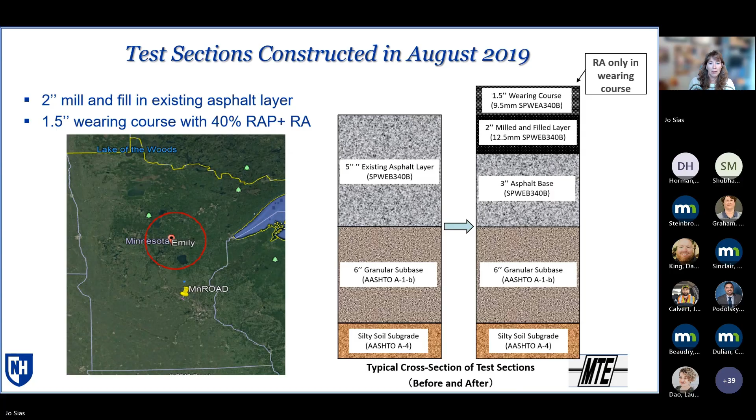But again, the focus is really on what's happening with these materials over time. In terms of the materials in each test section, there are 7 sections, each with a different RA product. The mixes had 40% RAP, and the dosage was determined by each of the RA producers with the intent of meeting a PG -34 target for extracted and recovered binder. Each producer had a sample of the RAP and determined the appropriate dosage. These 7 RA products are in test sections numerically ordered from 6001 to 6007.

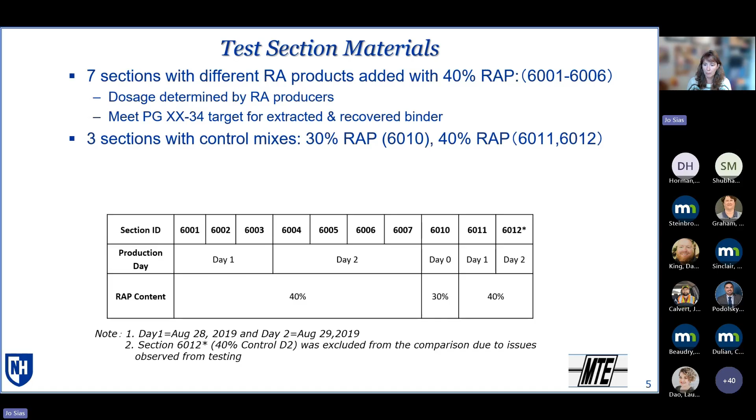There are also 3 control mixtures: a 30% RAP mixture, which is 6010, and 2 40% RAP control sections, since these were constructed over 2 days, so there's a day 1 and a day 2. One thing to note is that during the initial phase 1 work, we found some issues with the day 2 control, the 40% RAP. So while all the testing results are included in the report, for the comparison we're just focusing on the day 1 40% control.

One thing to also note with the different RA products: 6001 through 6006 were all added in line at the plant, while the 6007 material was blended at a terminal. So while they have the same base binder grade, it's not exactly the same base binder that was used in 6007 as for the other 6.

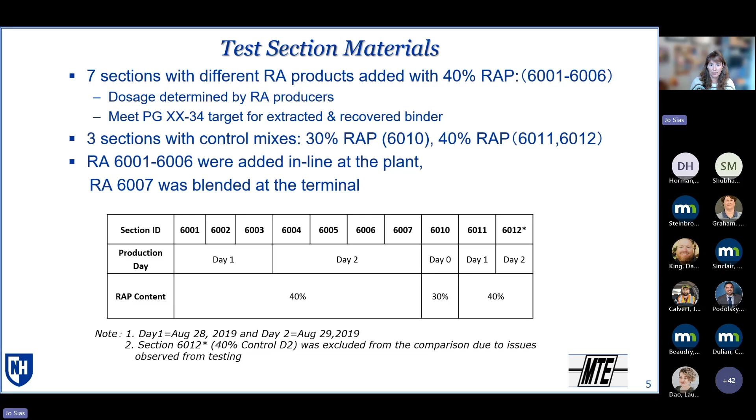Now the testing - this basically threw the kitchen sink at these mixtures. The mixture tests were conducted by various NRRA agencies, and additional mixture tests were conducted at UNH.

We've got a range of testing from Hamburg wheel tracking tests, TSR testing, to rheological testing with complex modulus, various fracture tests including the cracking tolerance index, direct tension cyclic fatigue testing, disc shape compact testing.

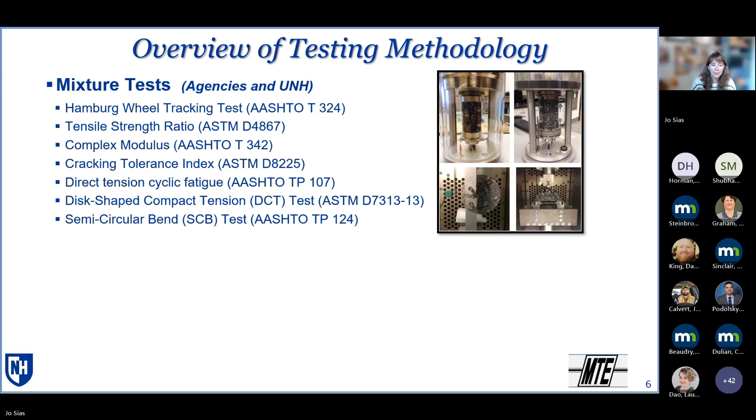Low temperature, and then semicircular bend or I-FIT testing was conducted on these mixtures as well. In terms of the binder tests, most of the binder testing was conducted by MTE, and this included 4mm DSR.

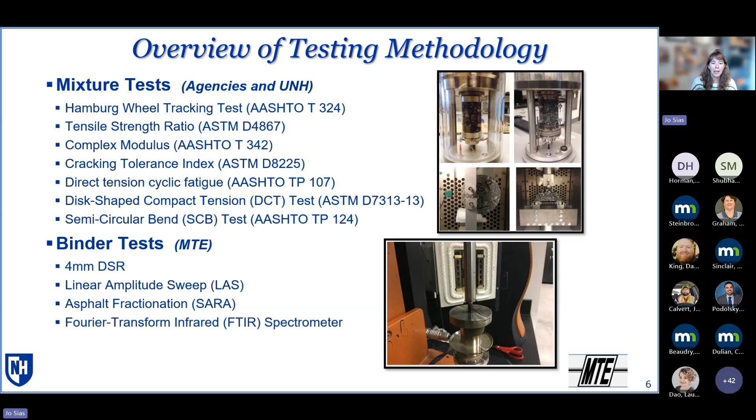This was used for rheological characterization, and that information was used to get the PG grade information using the documented procedure from 4mm DSR testing. LAS testing was also conducted to look at the fatigue of the binders, and SARA and FTIR testing was also conducted. This range of testing was conducted on a lot of different aging conditions.

This is an overview. We've got 10 different test sections, and from those test sections during construction, plant produced loose mix was collected. That plant produced loose mix was reheated and compacted for testing, and also conditioned in the laboratory with loose mix conditioning for 6 hours at 135, as well as 7 days at 95 degrees C. So 2 long-term aging protocols were used on the loose mix.

And then field cores are being taken every year. So the data that I'll be showing today shows the first 4 years of field core results. Now, from both the loose mix and from the field cores, binder was extracted and recovered.

The material that was recovered from the loose mix was tested in the as extracted condition - essentially short-term aging after it's been through the plant - and then additional 20, 40, and 60-hour PAV. We also extracted and recovered the material from the mix that had been through the 2 laboratory long-term aging conditions.

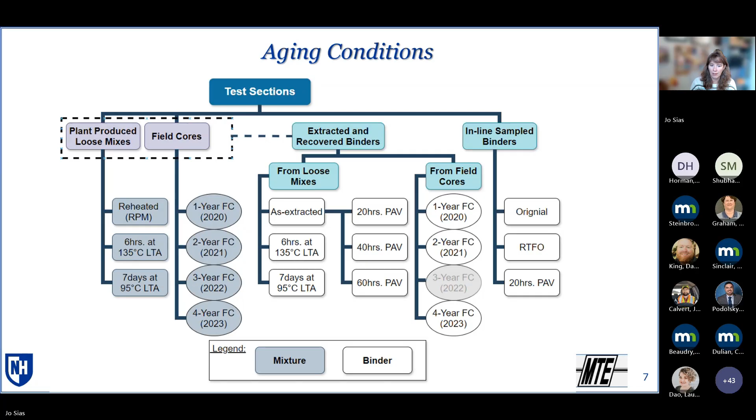So getting into some of the binder testing results - again, I'm focusing here on just the extracted and recovered binder materials. So we're going to start with the rheological properties.

Looking at the results from the 4mm DSR testing and looking at it in the form of the continuous PG information that comes out of that analysis. What you're seeing here in these bar graphs is each group of bars represents each of the test sections.

So you've got the 7 RA sections from 6001 to 6007, and then we've got our 2 controls - the 30% RAP and the 40% RAP. This is just the day 1 40%. In parentheses, you can see which day each of these materials were produced.

6001 through 6003 were produced on day 1. 6004 to 6007 were the day 2 production. But again, we're comparing everything back to the 30 and 40% controls.

Now, within each set of bars, you have the results from the field cores presented first - the year 1, year 2, and year 4 field core results. Then the next set of bars, with the yellow, is the as extracted from the loose mix, and then the 6 hours at 135, and then the 7 days at 95.

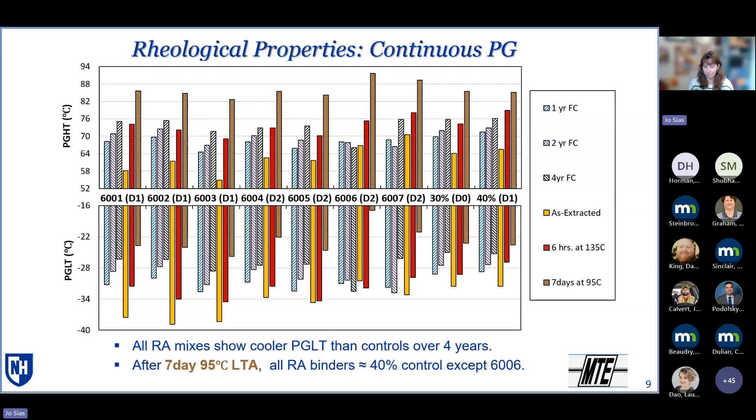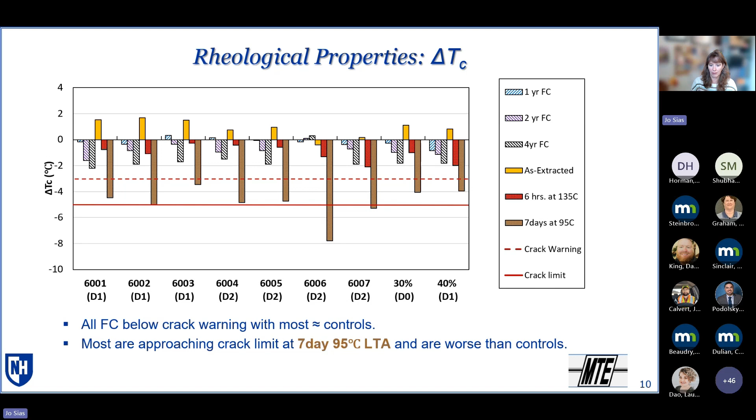Now we can also look at plotting this a different way. We've got a series of figures that shows the change in the different parameters as compared to the 30% control and as compared to the 40% controls. If we look at the figure in the upper left, this is for 7 different series of data — each of the RA mixes, looking at the relative percentage as compared to where we're seeing the control mix.

You can see most of these mixes, with the field aging, are getting closer to both the 30% control and the 40% control over time, with the one exception of the 6006 where it's showing a lot bigger difference. So if it's a more positive difference, it's a lot worse than what we're seeing with the controls.

So that's with the field aging, the two plots on the left. The two plots in the middle show what's happening with the PAV aging. Again, as a reminder, this is the as-extracted material as it was produced, then recovered and aged for 20, 40, and 60 hours.

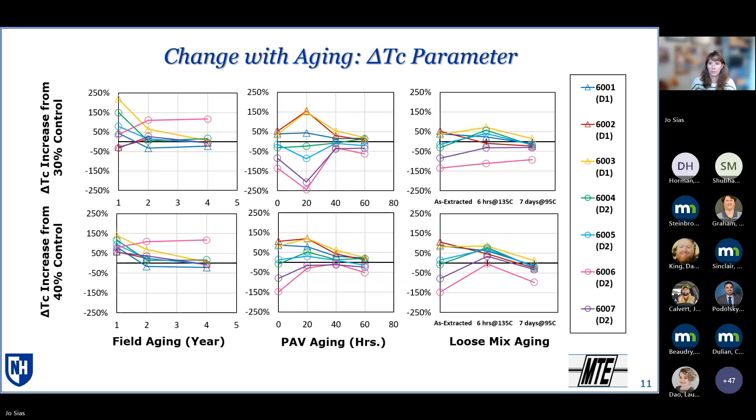Okay, moving on to the FTIR. What I'm focusing on here is just the carbonyl ratio. Same set of bars where we've got the change with the field cores, and then the change with the different laboratory aging protocols. Now with both of these, we're seeing an increase in the carbonyl ratio for the most part with all these different RA products. And we're also seeing generally higher carbonyl ratios than the controls for all the different aging conditions.

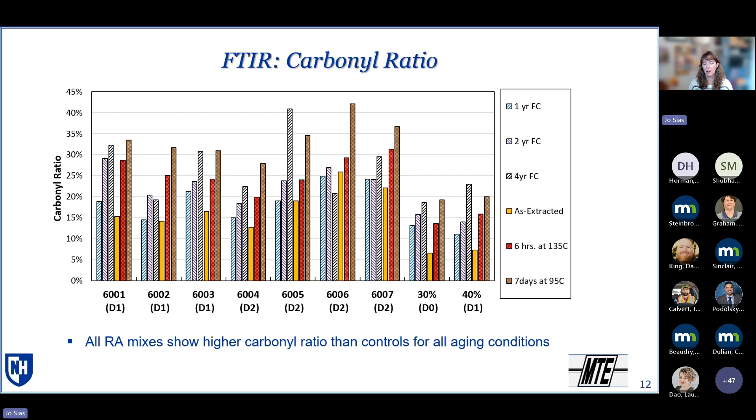This is expected just because of the chemistry of these different materials, that we would see different carbonyl ratios. So really focusing on how these are changing over time with the field cores and then also with the laboratory aging. Similar types of plots that we looked at previously, showing the actual carbonyl ratio values. With the field aging, in terms of the spread, how these change from the control values, not a lot of differentiation in terms of it changing a whole lot from the controls. So we're still not seeing a lot of difference there.

But when we look at the PAV aging, as we get from the 20 to 40 to 60 hour, we're seeing those groupings come a lot closer together when we compare them to both the 30 and 40% control. This is something we'd expect to see, where as we age them longer, things are getting closer in terms of those properties. Same thing we're seeing with the loose mix aging - as extracted, 6 hours, and then the most severe, 7 days. Again, the groupings are much tighter together.

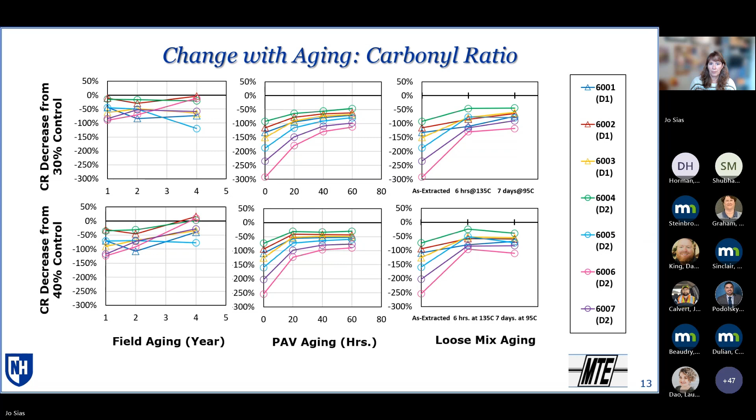All right, so moving on to some of the mixture testing results. We'll start again with the rheological properties. So we're starting with some of the results from the complex modulus testing. What I'm showing here is the Glover-Rowe mix parameter, which combines stiffness, dynamic modulus, and phase angle value, similar to the Glover-Rowe for binder.

One thing to note - because we're looking at field cores, when we do the testing on the field cores, we have to test them at whatever the field core air void content is. When we tested the laboratory mixes, we have control in the fabrication process, and those were all fabricated to 7% air void content. So to do these comparisons, what we've done is adjusted the field core results to an equivalent 7% air void content. The process for doing that is detailed in the report, but it's a way to try to get everything a little bit more on an even playing field, since we don't have the ability to control the air void content of the field cores.

Now with the mixed results, we do have the 3-year field core results in here, so you can see that additional orange bar for those results. Everything else is set up the same in terms of what we've talked about before, with the field cores presented first, and then the reheated plant mix and the 2 long-term laboratory loose mix aging protocols.

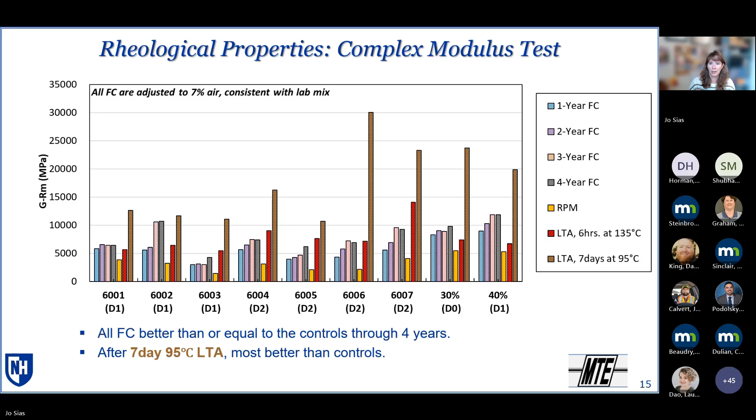Okay, so we've done the same thing in terms of looking at the change from the 30% and 40% control mixes. Again, positive value means a lower Glover Rowe mix property, which we'd expect to be better for cracking properties and performance in the field.

So if we look on the left-hand side at the field aging, you can see, again, pretty steady in terms of not seeing a whole lot of change through the 4 years of field aging for most of these mixes. Again, a couple of exceptions with the 6002 and 6007 when we look at how they're doing compared to the 30% control.

And then not as much of a change, but still seeing that change with the 40% control as well. For the loose mix aging, kind of similar to what we saw for the binder testing, where the 6 hours at 135, we still see quite a bit of spread in terms of the rheological parameter for the different RA mixes. And then 7 days, we're seeing things starting to come a little bit closer together. But again, the exact difference from those control mixes really depends. It varies from RA product to RA product in terms of the magnitude of the difference, and some are showing better, some are showing worse in terms of relative properties.

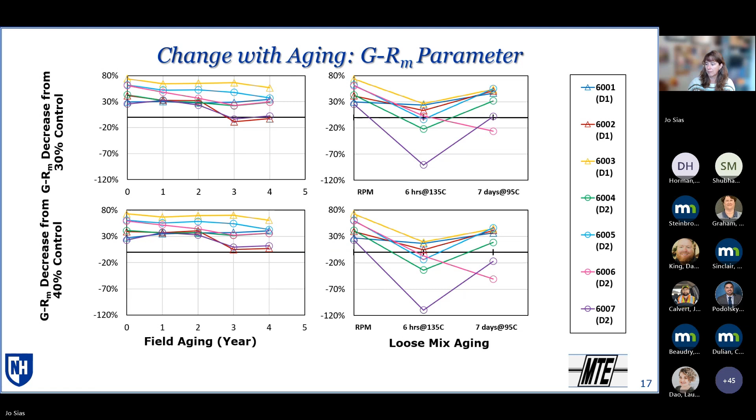Okay, so next let's look at a fracture test. So intermediate temperature fracture using the iFit test to show this parameter. One thing with this test, you'll see one additional aging condition that was conducted by the agency that did this testing. This was a long-term aging of 3 days at 95 degrees conducted on a compacted sample. So a little bit different, but I wanted to show this data just for comparison.

With the iFit tests, again, a note that for these field core specimens, these are the results with the in situ air voids, and the lab specimens are 7% air voids. So there is a difference between the field core and the lab specimens, and there wasn't an adjustment done on these parameters. But you can still look at kind of overall what we're seeing for that intermediate temperature fracture.

The reheated plant mix, those yellow bars, a lot of these mixes have pretty good values. We see the benefit of the addition of the RAs, especially just with this reheated material. Initially you're seeing the benefit for this intermediate fracture, and even after 6 hours at 135, most of these mixes, you're still seeing some benefit over the two controls.

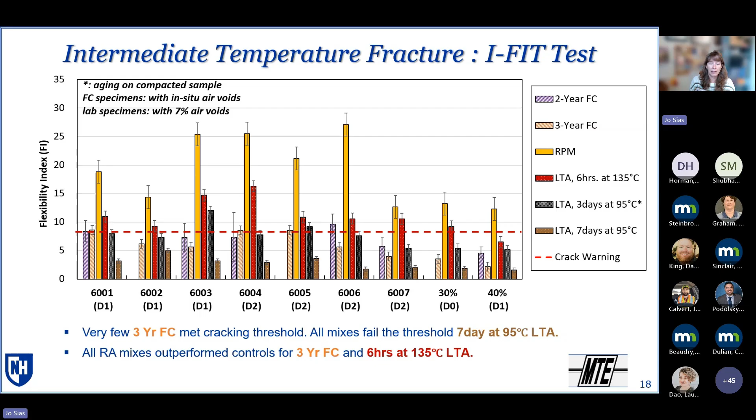So then when we plot these in terms of the relative changes for the flexibility index, in terms of the field aging, you can see we're seeing an increase in terms of both control values. But again, there's a little asterisk there that even though you're seeing better values, they're still failing the threshold.

And then looking at the different loose mix aging, again, we're not seeing a whole lot of change in terms of their relative difference with the controls. For some of the mixes, we're seeing them come closer to the controls. But again, you've got to remember the absolute magnitude of some of these values at the higher aging conditions, where everything's failing the threshold value once we get to that point.

And then moving on to the low temperature fracture test. So this is the DCT test results. This is a little bit of a different parameter than folks might be used to seeing with the DCT. So this isn't the fracture energy, but this is an index that also includes some of the post-peak information. So it does more than just looking at the fracture energy—it looks at what the shape of the curve is on the post-peak side.

And here for the DCT, we don't have any results for the field cores. We just have the results from the laboratory mix.

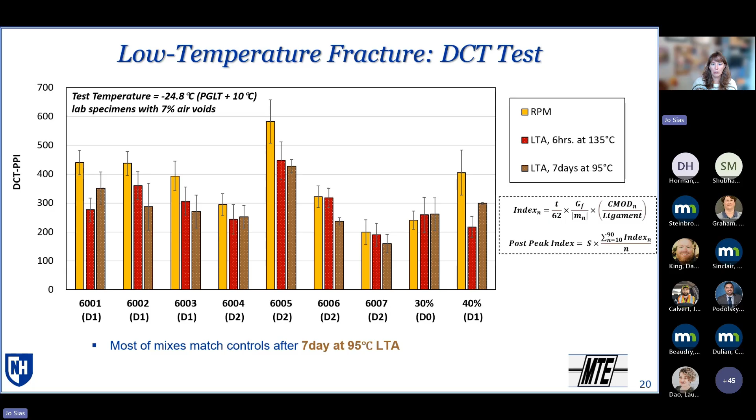And you can see that again with this plot here, showing that we do see the differences of the reheated 6 hours at 135. Again, depending on the mix, some are a little bit better, some are a little bit worse. But then once we get to the 95, you're seeing most of those RA mixes are coming very close to both the 30% and 40% control values, with the exception of that 6005 and 6007. One's showing better, one's showing a little bit worse.

Now the actual performance of the test sections. So we'll show the cracking field performance, and this is a function of the service time. Multiple surveys have been done, and this is just showing through just over 4 years of in-service. So the last data point that we've got on these figures is, I think, November of 2023.

So additional information has been collected, it just hasn't been collated and added in yet. The plot on the left is showing the length of cracking as a function of time.

Things that I want to point out here: the one that's showing the least amount of cracking, that dotted black line with the square, that's the 30% RAP control. And then the one that's showing the most cracking after this time in service, that's the 40% RAP control from day one. All the RA sections are falling between these two controls in terms of the crack length.

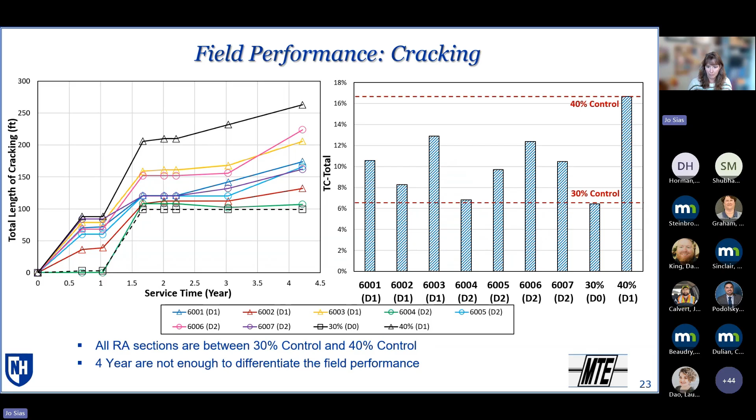And really what we're seeing for the cracking, 4 years of field performance, is really not enough to differentiate any of these mixes. Then in terms of the rutting and the ride quality, rutting is shown on the left over time, and IRI representing ride quality on the right. We're seeing a little bit of rutting, but really not a substantial amount in any of these sections. The one that's the highest is the day 2, 40% control. The two other controls of 30 and 40% are kind of the lowest rutting. So, with the dosing that was done with these RA materials, it didn't produce any concerns in terms of the rutting.

And then again, in terms of the ride quality, we're starting to see a little bit of an increase in the IRI, again, probably related to the increase in cracking that we're seeing in the later years. But again, still nothing substantial in terms of magnitude, and really not a lot of difference that we're seeing in terms of the different sections.

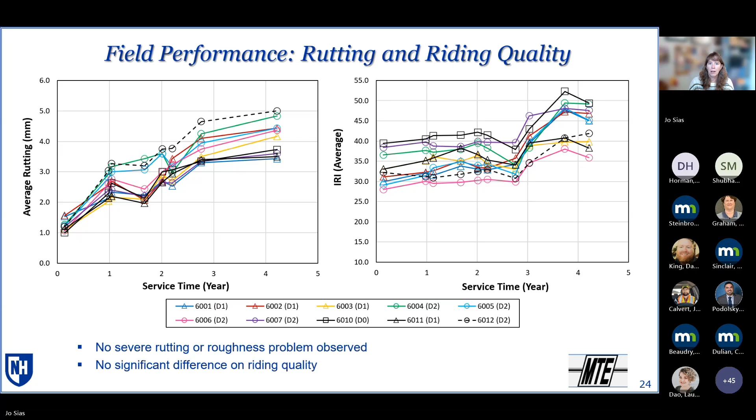Now, the other thing that we did was, because we've done both the complex modulus and the direct tension cyclic fatigue, we're able to run these in FlexPAVE and look at the performance prediction from a fatigue standpoint with the actual pavement cross sections. So what you're seeing here is the predicted total damage from this analysis after a 20-year analysis period. And this is done with 2 different sets of results from the testing.

Based on the reheated plant mix, that's what you're seeing with the yellow bars. And then based on the values that were collected from the testing that was conducted on the 4-year field cores, that is the black hashed bars. Okay, so a range of different aging conditions.

And really what we're seeing is not a whole lot of difference between the different mixes. And again, remember that the only difference between the sections is that top 1.5 inches. So when we're looking at fatigue, there's not a whole lot of contribution from the different materials in terms of the overall structural performance of these sections. But regardless, everything is still falling between the 30% and the 40% control materials.

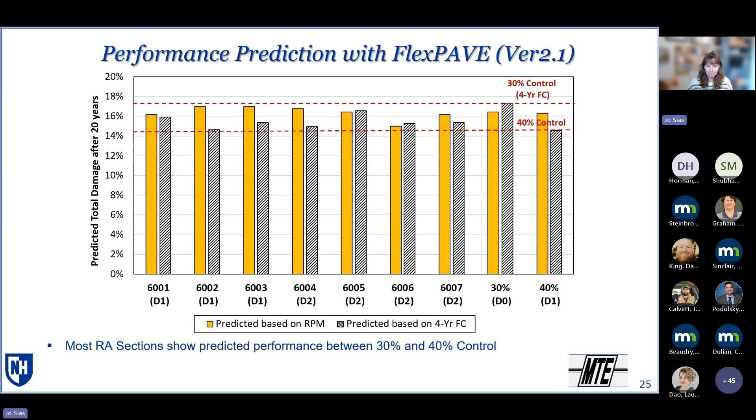So just to summarize some of the key findings from the binder analysis, what we saw was the RA mixes are generally showing similar or better low temperature PG and delta TC than the 40% control mix through 4 years of field aging. Most of those RA mixes have a worse delta TC when we're looking at that long-term loose mix aging condition. And, again, as we expected, because of the chemistry, we're seeing higher carbonyl ratios than the controls, and that goes through all of the aging conditions.

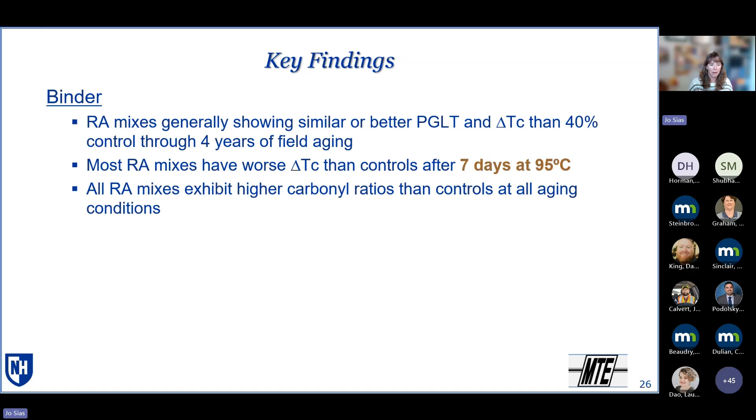From the mixture side, we're seeing improved properties for most of those RA mixes for 4-year field core and for the 7 days at 95 degrees C. In terms of the threshold values, if we look at the flexibility index, everything's falling below that threshold at that long-term aging condition. But when we look at relative property values, the RA mixes are still showing better values than the controls at the different aging conditions.

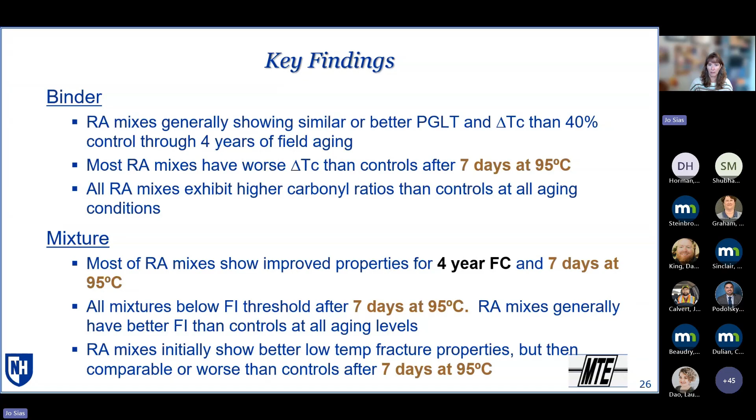And then RA mixes initially were showing better low temperature fracture properties, but then really coming to the same level in terms of the property values, or even worse than some of the controls after that more extensive aging condition, laboratory aging condition.

Field performance, again, we're still seeing mostly better cracking performance than the 40% control over 4 years. We're not seeing any rutting or ride quality issues. And really what we're seeing is that 4 years is not enough to evaluate that longer term performance in the field.

From the perspective of the aging protocols, that 7 days at 95 degrees C, so far that's definitely more severe than what we observed with the 4-year field core results. The 6 hours at 135, when you're looking at the different properties, these are comparable some to the 3 to 4 year field core. So for this location, that 6 hours represents somewhere between 3 and 4 years of field aging in terms of what we've observed in that top half inch.

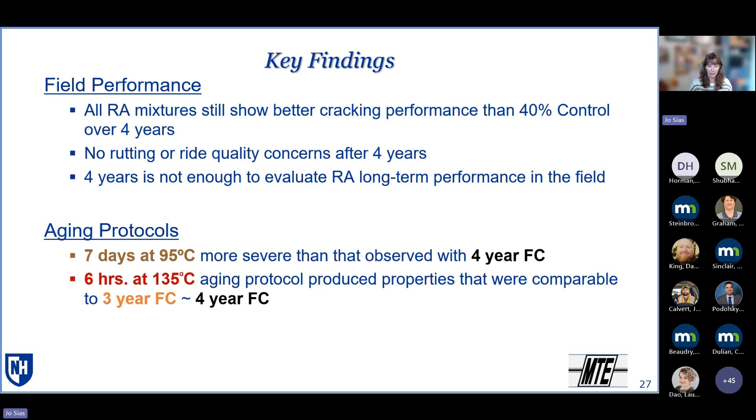So what we're looking at doing for phase 2, again, continuing monitoring these sections and sampling field cores. So we actually have the cores that were sampled in 2024 sitting in our lab ready to go, and some of the binder testing has already been conducted. So we're maintaining the testing that we're conducting from phase 1 for the additional field cores, so the mixture testing as well as the testing of the extracted and recovered binders.

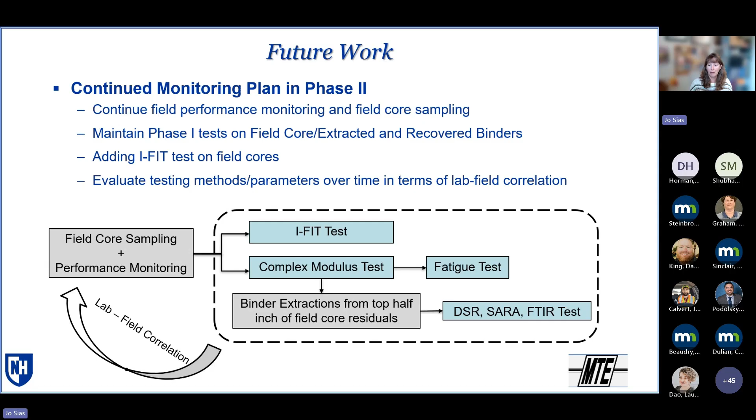We are doing additional I-FIT testing on the field cores for the future years, and continuing to evaluate the different testing methods and the parameters over time in terms of what we're seeing between the laboratory and the field in terms of what's the appropriate way to look at these materials in the lab to correlate best to expected field performance. That will be continuing for an additional 3 years.